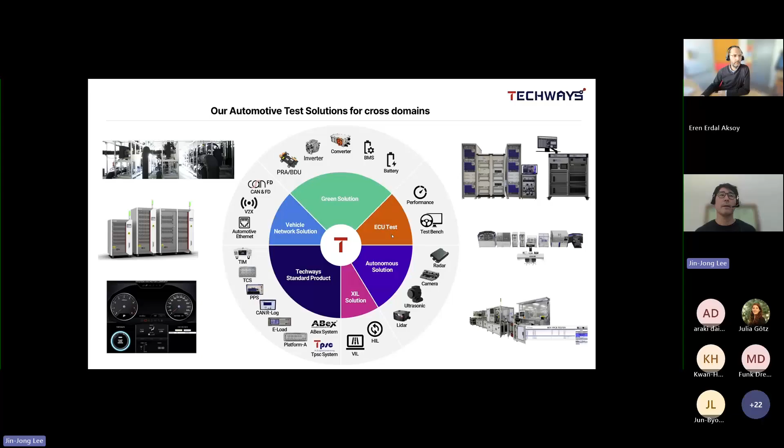So today I'd like to introduce a little bit about what is our standard hardware solution, and how you might combine it with one of your platforms. And then today I'll change the topic a bit.

As we all know, for autonomous driving, testing is changing since the last years. We cannot handle everything with manual testing for on-road testing. Instead, we need to go through virtual validation. So I believe ROADVIEW is also one of the topics with extreme weather conditions - you'd like to test everything, even extreme weather with some unexpected situations. So we have a lot of challenges now - how to make a virtual way to calibrate the testing. So I'm mainly focusing on hardware in the loop testing for the topic, so we can discuss more how to improve our testing strategy with the test system.

So I like to go back to the hardware topic a little bit. When you develop your hardware in the loop system, looking at the left side picture, many people use industrial I/O, data acquisition modules, or digital or switching modules, but this system is normally not natively designed for automotive specifics. So you need voltage mismatching for the digital level, and then you need to develop external signal conditioning to match the voltage level for automotive. And also you don't have any power handling mechanism in your device like KL15, KL30. And then finally, your system becomes more complex.

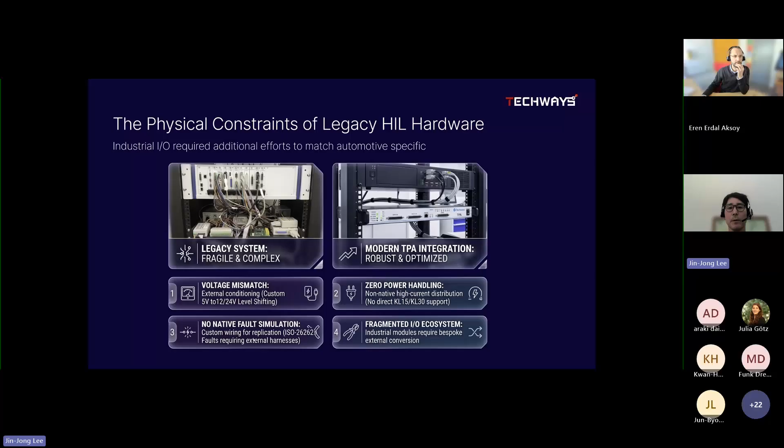And also one of the themes of the last decade is functional safety, so you need all the functional safety features done. So what we see from our experience is that you need a very automotive-specific hardware solution for your ADAS domain controller or any ECU testing.

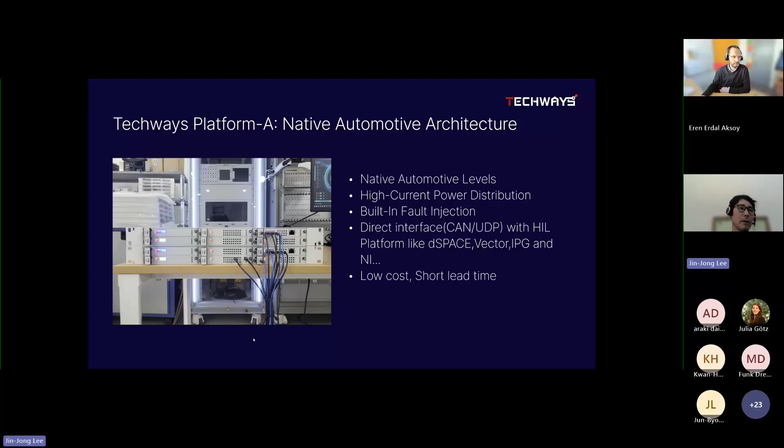So this is one of our platforms, hardware platform. We only design for native automotive testing. For any ECU, you can directly hook up with the native automotive level. So all the high current power distribution built-in fault injection, and also pretty low cost. And then you can combine it with different platforms like dSPACE, Vector, IPG, or NI. So that is one of the benefits of our standard hardware.

So our motivation to develop and design this was to serve a better way for automotive customers who want to validate their ECU, to reduce the complexity of designing their system. So with a standalone architecture and plug and play, you can connect with LAN and CAN interface, giving you a lot of scalability. You can choose - this is one of our factors - like 1U size or 4U size, but you can use the same module inside different rack sizes.

So here is a brief specification. Here you have a power distribution relay to simulate your KL15, KL30, and you can even measure your current, like sleep current, dark current, during your ECU going to sleep - you can measure directly with this module. Digital PWM, analog input, analog output - we designed all for automotive level, so you don't need any external signal conditioning, you can directly use our system. So from experience, with this one single rack size, most ADAS ECU, AD ECU can cover all the I/O signal. So that is our lesson learned from our project.

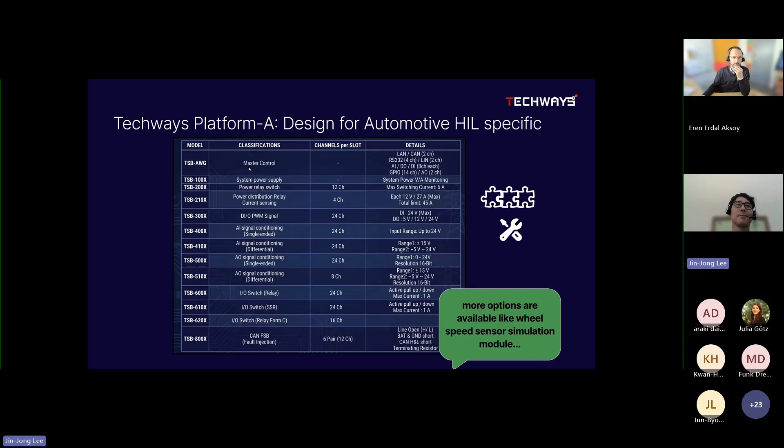So you can use our system that way, either with dSPACE, NI, Vector, or other tool chains. You can use our TPA for the electric signal connection with your DUT. And finally, you don't need to change any hardware side connectivity with your DUT.

This gives a lot of freedom for scalability in our system. This is what we suggest for our hardware platform when you develop a hardware in the loop system, or even other XIL systems.

And then I'd like to talk about the test automation tool. You know, traditionally, test automation tools are always vendor specific. So you have a test automation tool from the specific vendor.

The test engineer always develops test cases and test scenarios based on tool dependency. They have different types of languages, different file formats, and finally need a lot of effort if they want to change to another system, or need a dedicated independent engineer for each system. This raises the cost and raises the time.

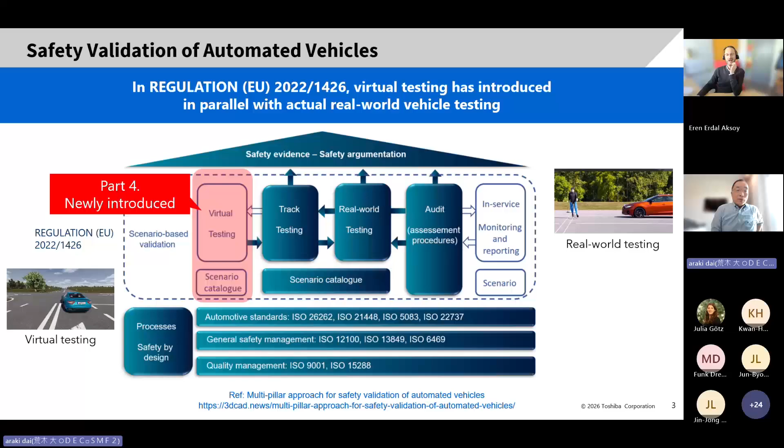Today the topic is safety validation of automated vehicles. Maybe as you know, in EU regulation 2022, it defines virtual testing as the future of certifications. That means traditionally certification is mainly done by real world testing, but the new regulation part 4 introduces this new definition about virtual testing for certifications.

Actually this year is the first year for virtual testing for NCAP. NCAP 2026 formally integrates virtual testing into the rating protocol, so all manufacturers need to care about this topic, because the simulation work should be done by the manufacturer side, and show the qualification and validation results to the certification bodies. Euro NCAP has also announced that this way will become wider in the future, so autonomous driving or advanced driving systems need to care more about simulations.

In this year's NCAP 2026, certification is starting from the emergency braking system test. They are defining four types of simulation tests, car-to-car or car-to-pedestrian tests, and they already defined KPI errors to compare between real test and virtual test. In this case, they define the whole KPI for the timing of warnings, the timing to start braking, and the remaining distance - you need to compare the real test and virtual test within this KPI error rate.

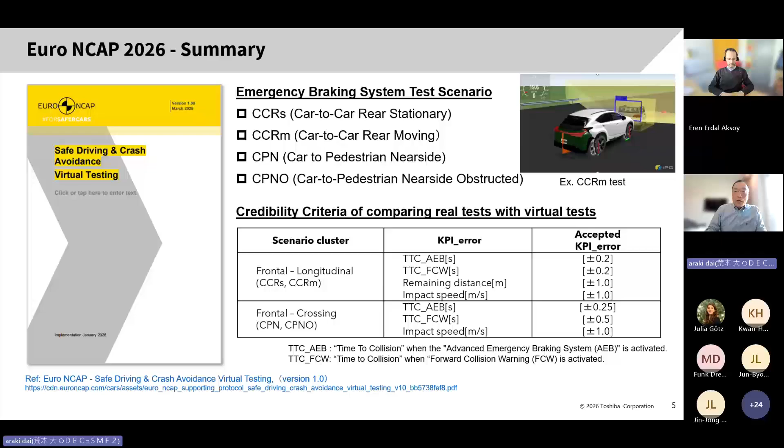This is related to the previous presentation from Techways, and the generic framework is common. We need to combine the simulations of environment, sensors, control vehicles, and some test scenarios should be put into the simulation framework to make the results.

We have three open issues. One is how to achieve collaboration in a simulation framework - the simulation work is often handled by multiple teams, OEM and suppliers, so how to achieve collaboration is one big issue.

Second issue is how to generate, how to collect enough test scenarios for the validation. The third topic is maybe a major topic - we need to care about the comparison between real test and simulation, so the simulation needs quality and credibility in the results.

We are initiating this virtual homologation project with ProStep in Germany and ASAM. Last year we made the announcement of this new initiative at last year's ProStep Symposium 2025. Then we started discussion in the group between ProStep and ASAM, and we have held several workshops for the event between ProStep and ASAM. This is the third one, held just this week.

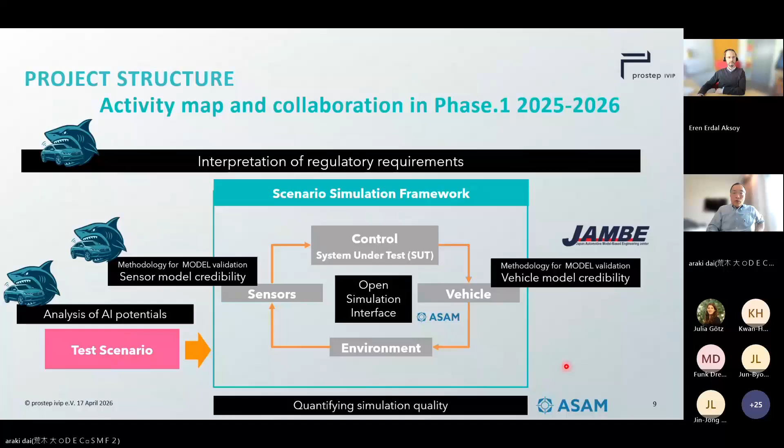Thank you so much, Araki-san. I'm sorry that my camera is not working today.

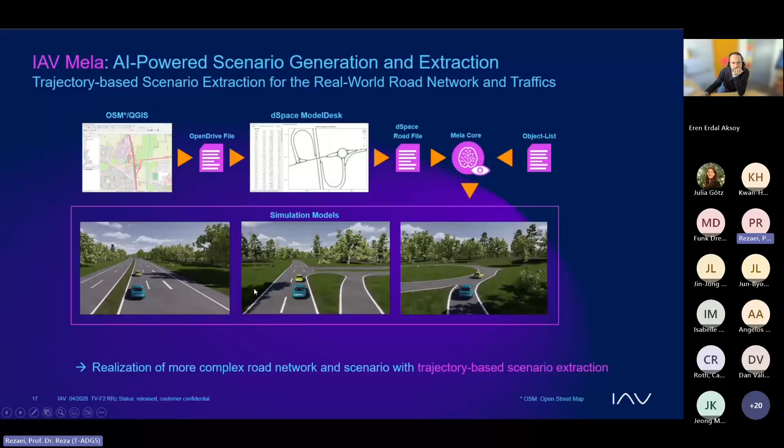And that was in DSpace. Now it's in open scenario, open drive. We also have the possibility with our engineering at IAV to create a map if we have specific map data, or a direct definition of the object list from the sensor supplier. If the sensor supplier can provide the object list, this is also possible.

As mentioned, here's a summary: we can get DSpace native models, IPG CarMaker native models, and also open scenario, open drive. This will give the OEM or the user the maximum flexibility to work with the state of the art of the simulation software.

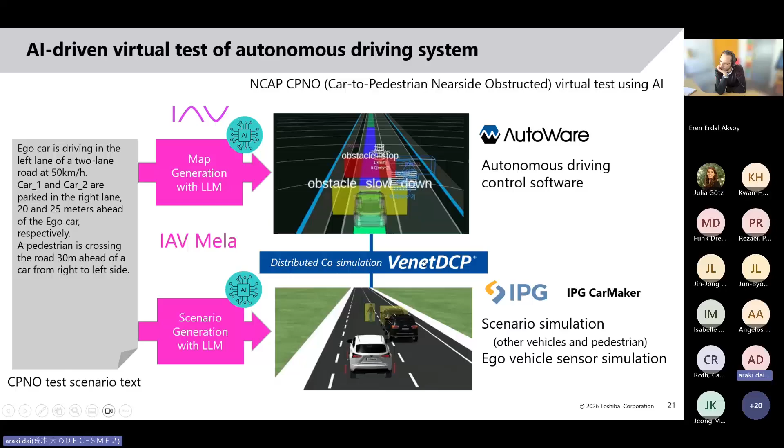In this case we utilize our DCP, a distributed simulation framework, so that this can enable coupling of different simulations crossover the network, so that these two simulation systems can be executed at separate places, at separate companies.

Here is some simulation use case. We are running the simulation system in parallel - the right side is AutoWare, and the left side is CarMaker. On one side some people are parking, so AutoWare can automatically slow down the vehicle, and some pedestrians start crossing the road, so AutoWare stops the vehicle, and after the pedestrian crosses, it can restart.

This is a typical NCAP test case.

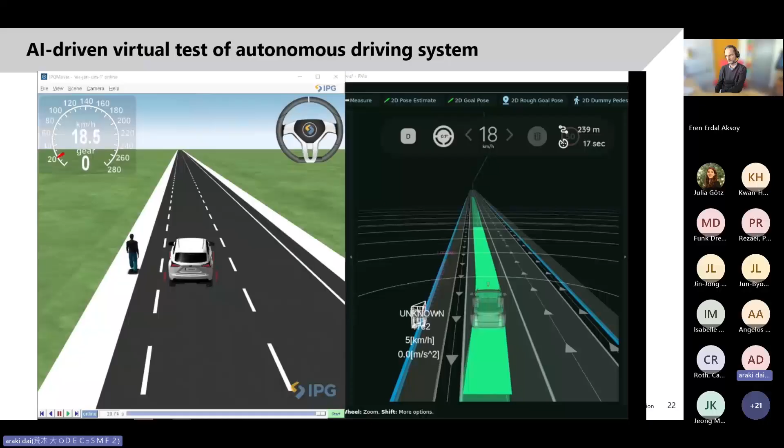Okay, I will summarize the questions. I pointed out three open issues in ADAS virtual validation. The first is that we need some collaborating or integration environment to combine the different simulation systems. Techways' presentation also covered these topics.

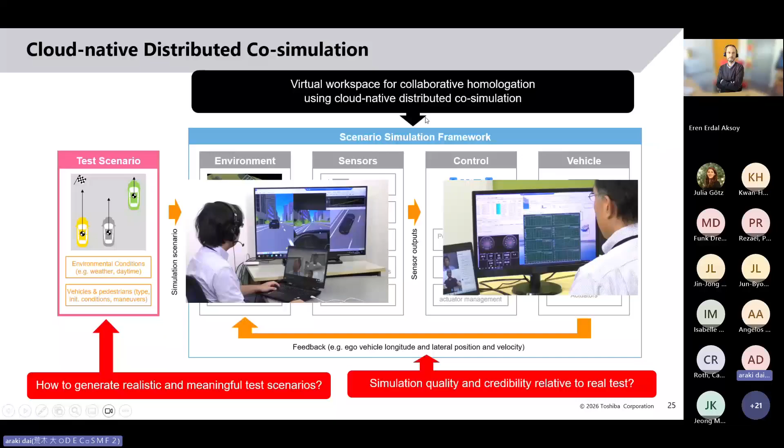The second topic, today's main presentation, is how AI can help reduce the workload for scenario generation. The remaining topic is how to measure model credibility between real test and virtual test. As a first step, our team is trying to define some achievements, a common API for measuring it.

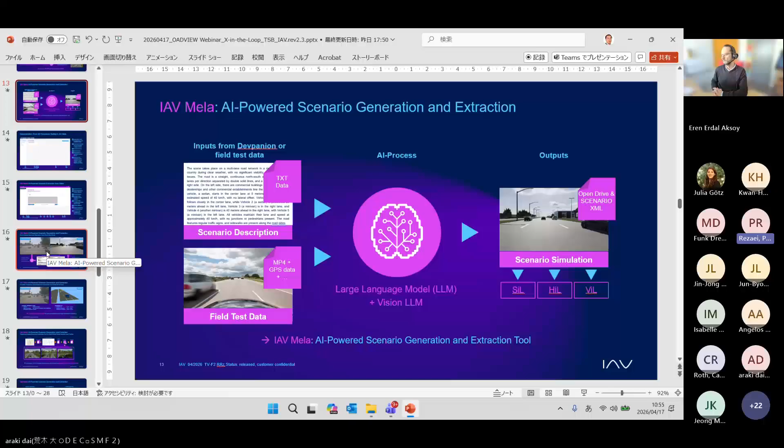So just to make sure I understand, basically from the camera, are you taking the style of your scenario, or are you really getting the ground truth? Are you able to take positioning of the vehicles from the camera, or do you always need to add the object list to it? Yeah, it's a very good question. Both are possible. If you have the object list, you can give it. If you don't have an object list, then we have a Mela pre-annotator, which is not shown here, but the pre-annotator will detect the objects and calculate the distances. We published for JSAE a kind of comparison between the distance estimation from the camera base and the LiDAR ground truth.

To make it short, Mela can also create the object list from the camera using its own computer vision part as well.

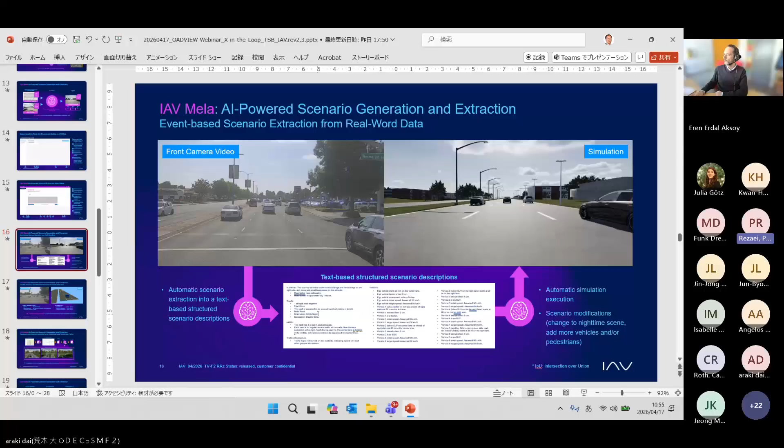And he's going to be talking about weather relevant ROADVIEW weather-aware X-in-the-loop test environment. The stage is yours. Great, thank you very much, and thank you for the introduction. So my name is Maikol Drechsler. I'm from the Technische Hochschule Ingolstadt, the University of Applied Sciences in Ingolstadt, from the research center CARISSMA here in Germany.

So I would like to start with the objective, or what was our idea when we started the project. The whole ROADVIEW project is focused on the development of weather-aware autonomous driving systems. We want to develop vehicles that can drive under harsh weather conditions. One of the important topics inside of it was the development of a test system that we could also use for validating it in specific weather conditions.

So the idea was to implement and validate this X-in-the-loop system in which we could reproduce the extreme weather conditions from collected data in specific test conditions, so in controlled environments. We also wanted to validate this somehow, so we needed to define some metrics to do this validation and define a methodology to compare the real world and the simulation.

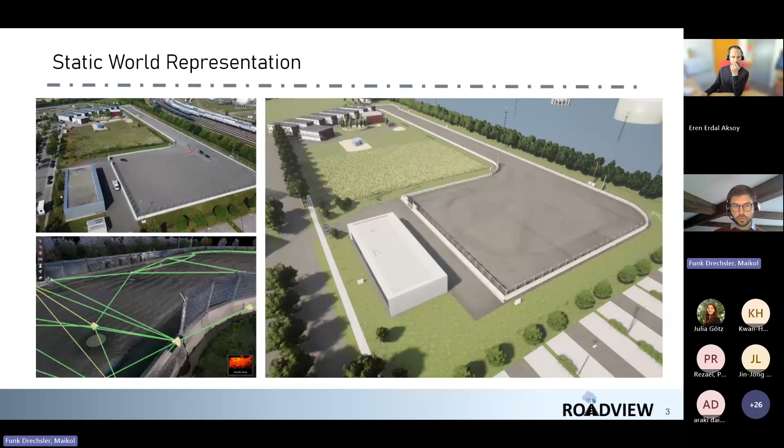And this static world was then integrated inside Carla for doing the tests. We have not done this, what we call digital twin, but the static world only from CARISSMA, but we have done it for all over Europe, also from Cerema in France, from Lapram Proving Ground in Finland, and also in Turkey from a public highway.

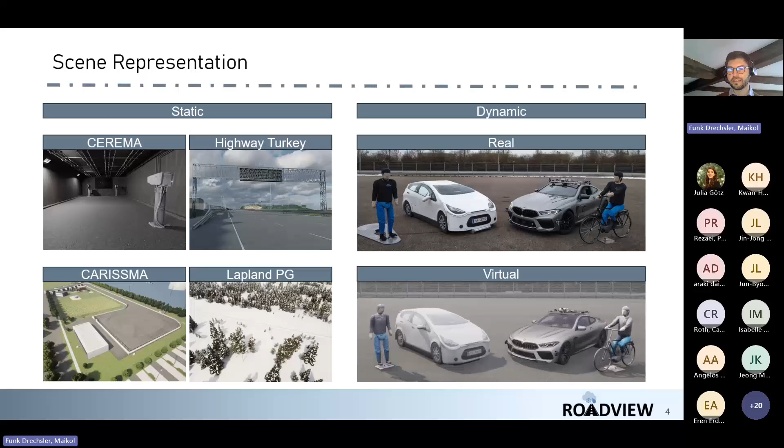For the validation part, we have mainly focused on CARISSMA test track, since we could easily reproduce it in our test track. So the real test could be easily reproduced in the real test track. And we have also done more or less the same approach for the dynamic targets, including the ego vehicle, which in this case is the BMW M8, and also for the different targets that we wanted to use in this testing campaign.

And in parallel, we also collect data under controlled weather conditions. So for doing that, we use a mobile facility, a rain facility, in which we first measure it. We define how we should build this facility in a way to get controlled measurements of the intensity of the rain, because the main point is that most of the simulators that we have nowadays, you can set the rain intensity between 0 and 100%, but you don't have a direct comparison to the real world.

And here what we wanted to achieve is that we want to set 10 millimeters per hour rain intensity, and we would have at least a statistical approach, or physical approach, that we could achieve exactly the same characteristics of our camera sensor and LiDAR sensor.

So we also went to France, and in Cerema we also have done this data collection under fog conditions, and we also have collected open world data from snow. So we have done this data collection with 2 different types of LiDAR, the rotative LiDARs and MEMS LiDARs, also for the radars, thermal camera, and RGB camera. What you can see here is clean weather, but we also have done them for different intensities of rain, different intensities of fog, and also snowy conditions.

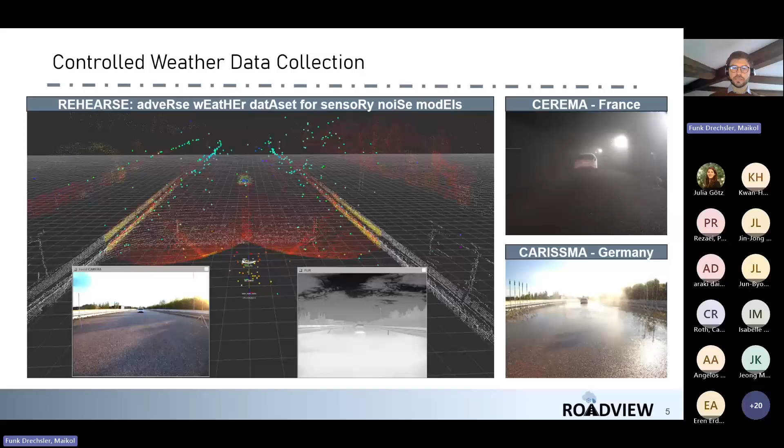And then just capturing this data was not enough. So what we have done is we have analyzed this data and we understood how this data was influencing each one of the sensors, how it influences the RGB camera, how it influences the LiDAR, and how it influences the radar. And then we have modeled it.

Once we have the models and once we have the scenarios, we want to be able to test the algorithms that we are developing in ROADVIEW inside the final control unit, the same control unit that will be put inside the real vehicle, mainly because in the end we want to do this comparison, so we need to have everything already embedded in the car.

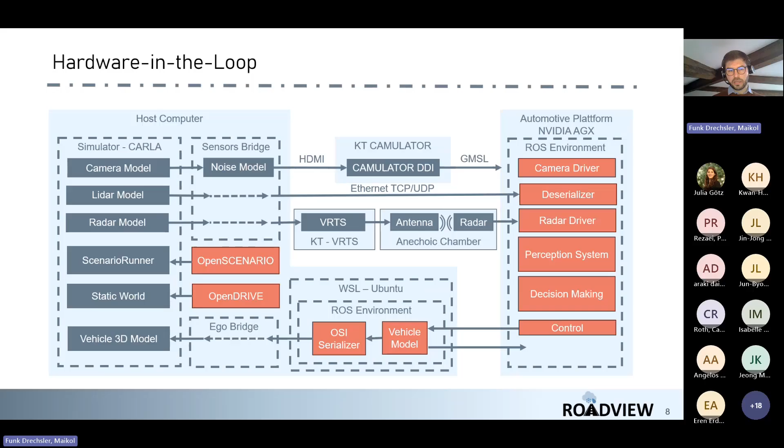So we calculate the position of the vehicle, send the data to the simulation which calculates new data from camera, LiDAR, and radar, and send it back to the control unit.

For the sake of comparison, and trying to understand which will be the best method or what are the limitations of each one of the methods, we also implemented a vehicle in the loop.

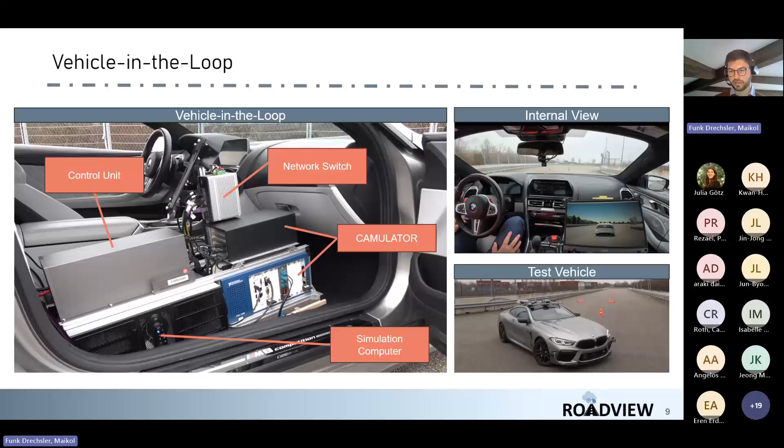So in this way, we changed the vehicle dynamics model, and we had the real vehicle, which drives on an empty road, as you can see in the top right image. The vehicle is driving autonomously, and it brakes for this target that you can see on the monitor inside the vehicle. So basically, it reacts to the virtual entities.

So the application is more or less the same. The only thing is that we don't have the vehicle dynamics model at the bottom anymore, and we also don't have the emulators because we can't fit the over-the-air anechoic chamber inside the vehicle.

So we do the simulation of all the sensors directly. We inject them into the control unit, and we directly take the positioning of the vehicle and then send it back to the simulation computer.

Also, to highlight what I've been talking about before, we try to make everything conform with the standards as much as possible. So we have been using OpenDRIVE to describe the map, OpenSCENARIO to describe all the scenario elements around the ego vehicle, and for data exchange, whenever possible, we use the Open Simulation Interface, which is a way to describe the messages that will be exchanged.

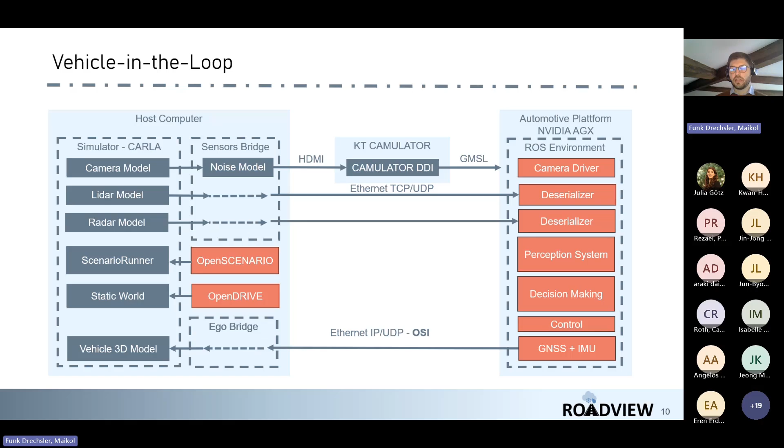So then, for doing the validation, as shown in the regulation, we should do it in a stepwise way. We need to start validating our subsystem, then go to vehicle system validation, then sensor validation, until we can validate the whole system. So for that, we first start validating each one of the models.

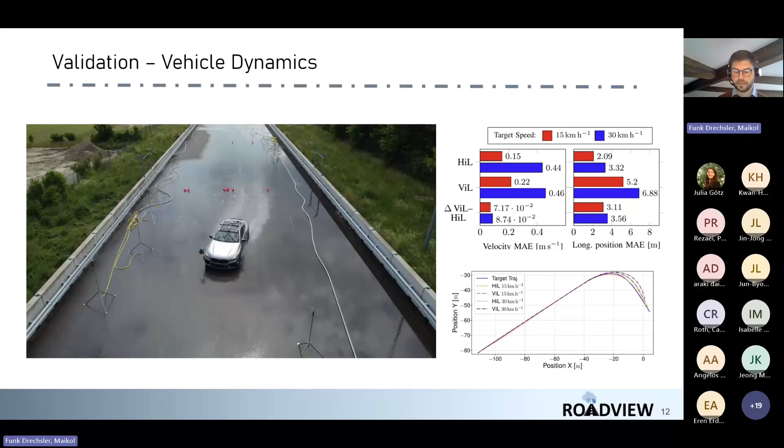So we validate our vehicle dynamics model that we developed inside the project. We have validated our camera model using ISO 12233 targets, which are usually used for the validation or evaluation of camera performance.

But when we evaluate the perception system, it doesn't perform so well as expected, so it doesn't have the same correlation. At this point, we need to start looking at what features the AI uses in our camera and LiDAR data to collect the data. More than they need to look similar to us, the most important thing is that they need to look similar to the AI system. So we need to try to understand what features the AI is looking at inside our sensors, so that we can reproduce them in simulation.

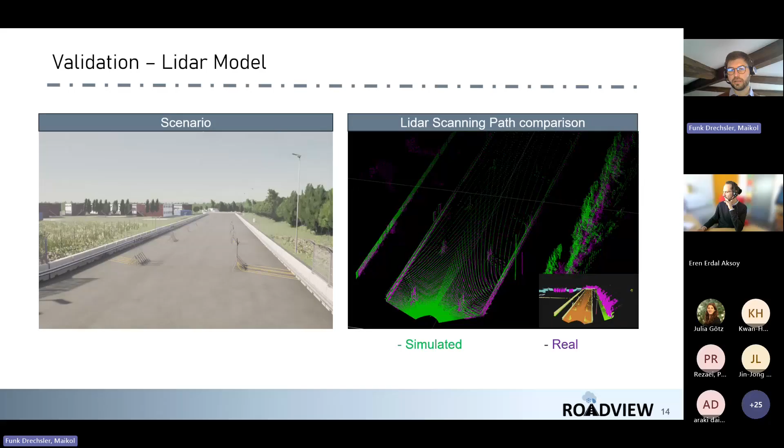Something similar we have done for the LiDAR model, where we have validated the scan pattern that we have created. On the right side, you can see the real and the simulated path put on top of each other.

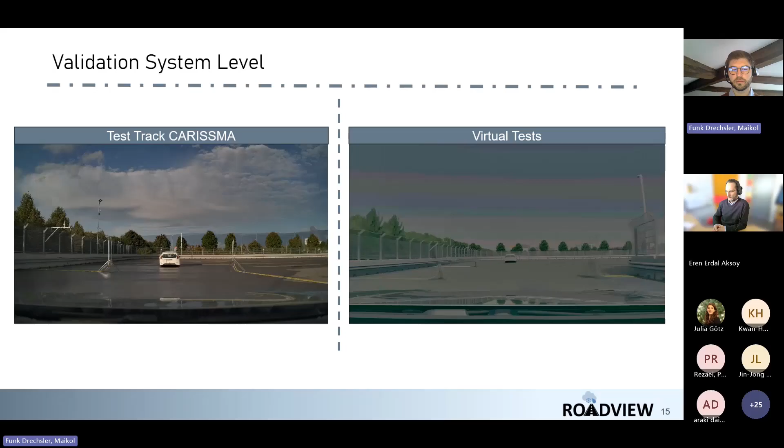Then we arrive at a validation of the whole system. We have conducted the same test in the real world and in simulation, and we start seeing some differences between them. We have done 3 different test scenarios: car-to-car rear-stationary, the rear-ending scenario, the pedestrian crossing, and also the bicycle crossing. So we're just taking some data so that we can start understanding some stuff.

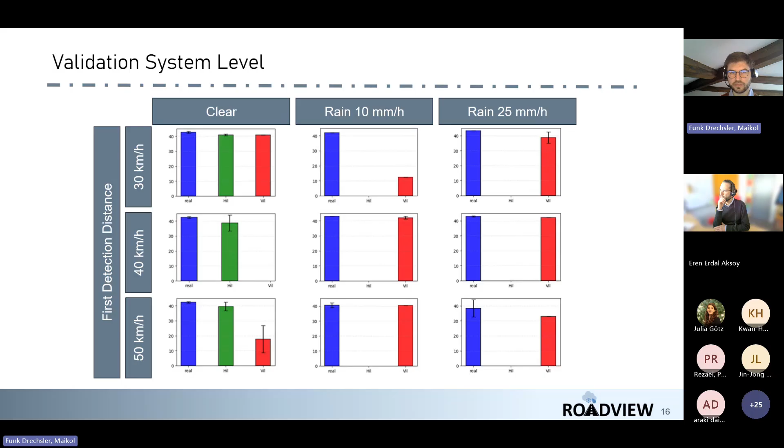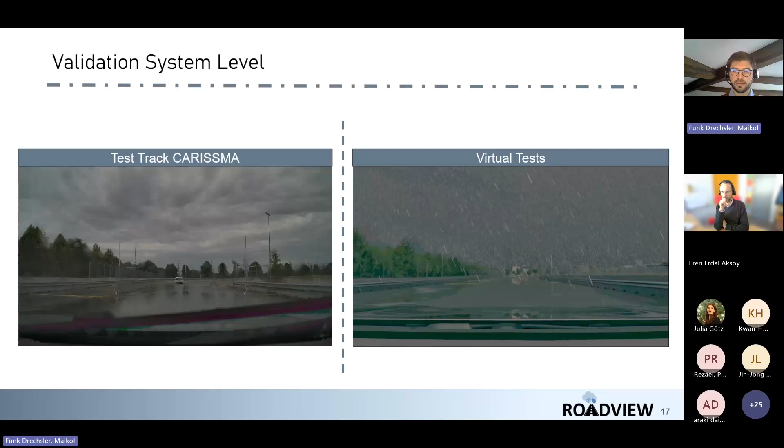But evaluating this, we can see that the perception system we were using in simulation was a state-of-art, out-of-the-shelf system that was not prepared for rain conditions. In the virtual environment, we have rain across the whole test track. In the real test track, we have the rain just in a specific area. So the vehicle in the virtual test was braking much earlier, and due to that it was not detecting the object at all, because it was reacting much earlier than that. This also brings us to think that a direct quantitative evaluation is sometimes complicated, because despite having the same subjective reaction on both sides, just a number makes it quite complicated to evaluate here.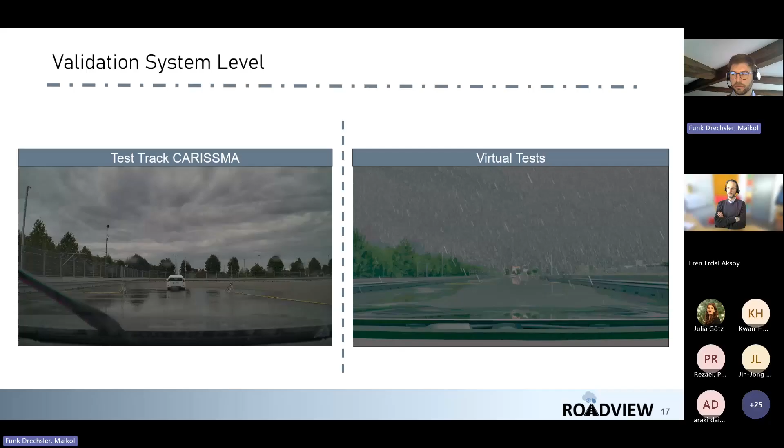We also went to check the behavior of the vehicle. In the real world and in the vehicle dynamics model, the behavior of the vehicle was similar, within the limits that we defined. With that, we have seen that the most challenging part was the perception system. So most of the time we can focus on field testing, because vehicle dynamics doesn't play such a significant role, mainly when testing at the low velocities we use in urban scenarios, for example.

We also evaluated the performance of the systems. We see that CARLA has some limitations, mainly when we start applying several sensors. In this case, we had really bad performance for fog, but we solved this by changing the parameterization methodology we used, and we achieved the 10 hertz that we wanted. That's basically the same frequency the real sensors send when we reduce a little bit the resolution of the LiDAR.

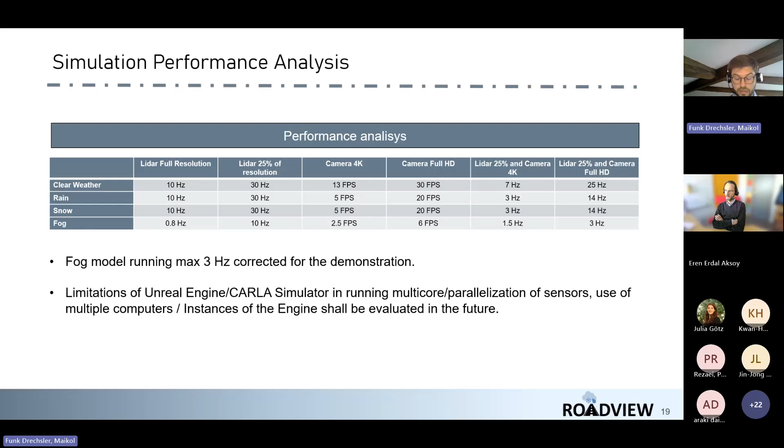So finally, as a conclusion, most of the things we already discussed, but some challenges are that for emulation, for example, when we want to do direct data injection of different sensors, we don't have standardized interfaces, so it's quite complicated to inject data inside a sensor and try to understand how it will behave inside the X-in-the-loop system. There is no standard model description, so it's super complicated to port the models from one system to another.

We are still facing some limited performance of the simulator, and we need to focus on recognition of the features that the AI uses to recognize objects inside the simulation, so that we can improve our simulators for the AI or for the perception algorithms, and not for human eyes.

HiL is much more practical than ViL, mainly for the development process. ViL will be a benefit once you have the whole car fully mounted and you want to conduct a homologation process, testing on the real track like a VR system for the vehicle, reacting to the virtual environment without needing to model your car every time. But the biggest challenge is still the perception system, so how do we stimulate the perception algorithms properly? Hardware-in-the-loop should be enough for the tests.

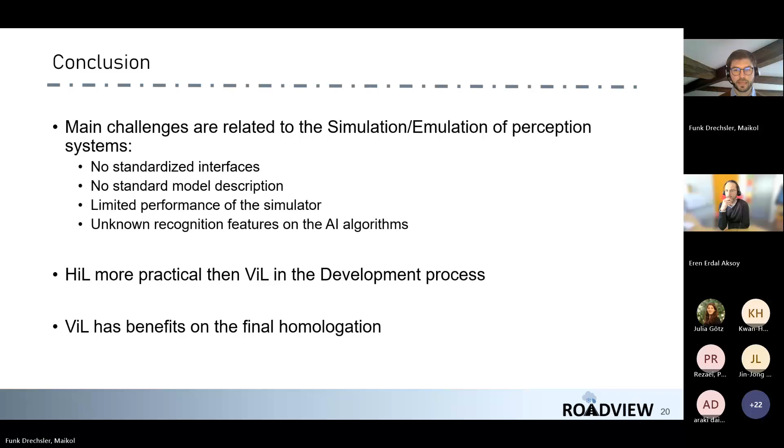Okay, great, thank you. Basically, we have collaborated with Open Simulation Interface a lot in the past, mainly for the description of vehicle data. When we started working with the car, there wasn't exactly the data we needed for describing vehicle motion the way we wanted, so we worked with them on that. But we are not involved now in this part of high fidelity sensor simulation.